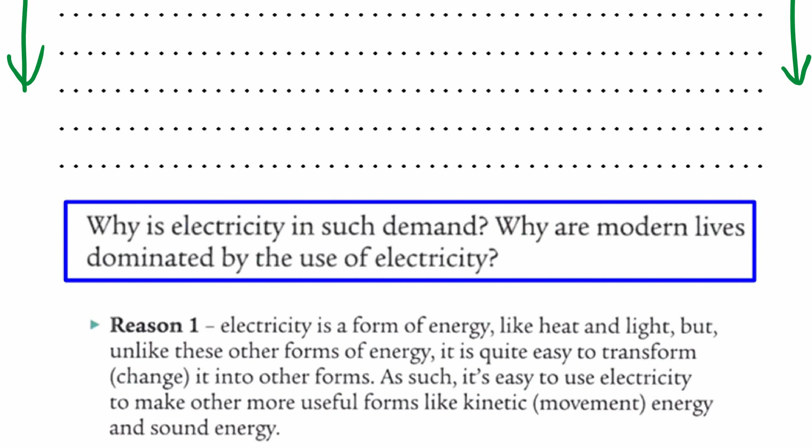Reason 1: Electricity is a form of energy like heat and light, but unlike other forms of energy, it's quite easy to transform, to change into other forms of energy. As such, it's easy to use electricity to make other more useful forms like kinetic energy and sound energy.

Just to put that into context and for you to gain a deeper understanding and appreciation of that, what I'd like you to do is complete this table. There's one that's been started there on the screen for you. I'd like you to use 2 keys, ideally highlighted in 2 different color pens as you can see on the screen, to show which forms of energy are useful and which are wasted, because we're going to be learning more about that later in this topic. And I'd like you to do it for 4 different appliances, which you've got written down there.

The first one has been done for you, the TV. If you think of a TV, light comes out of it, that's how we see images on the screen, and sound comes out as we listen to what comes from the television. But a byproduct of producing that light and sound is that we also produce heat energy, which is wasted. So copy down in your booklets what's on the screen, then write down the types of energy electrical energy is transformed into for the toaster, the hairdryer and the washing machine, and use your own key to show which is useful and which are wasted. Press pause now, and when you've completed the table, press play.

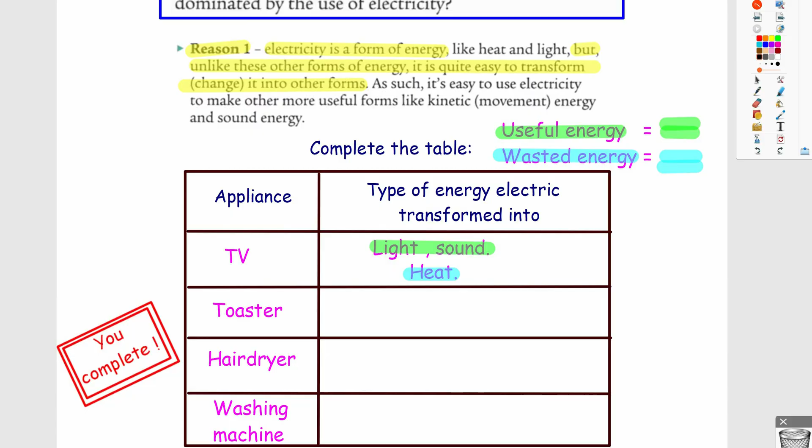Okay, now I've completed the table, and what I haven't done yet is highlight the useful forms of energy. So the toaster: heat, to toast the bread. In a hairdryer you need warm air, and that air needs to move towards your hair. And in a washing machine: heat of the water, and kinetic energy to turn the drum of the washing machine around.

So what's left over, of course, are the wasted forms of energy. There'll be a bit of light as the wires in the toaster heat up, and the hairdryer makes sound, as does the washing machine.

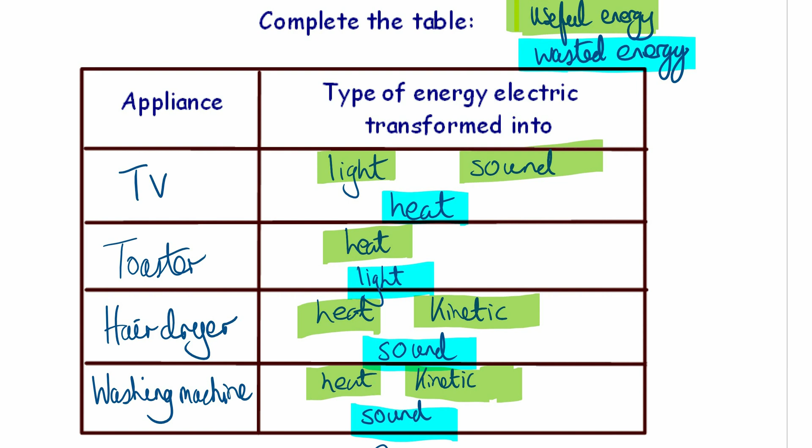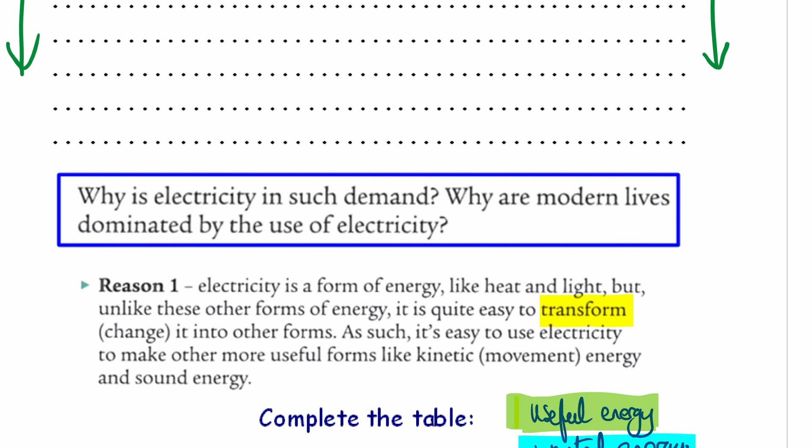If you turn to the next page, it says summarize reasons 2 and 3 in the lined paragraph. Remember, we just looked at reason 1, and the reason why electricity is so important is that we can turn it from one form into another.

Now reason 2 and 3 I'm going to put up in the video now, but then I'd like for you to turn that into your own words and complete 2 paragraphs, writing down reason 2 here and reason 3 here.

Here are the other 2 reasons, and what you need to do is write this down, paraphrase it into something that makes perhaps more sense to you. I'll read through both reasons. Electricity is relatively easy to move over long distances. Electric current travels well through metal wires, which makes getting electricity from one place where it's generated to a place where it's needed very simple. So that's all about moving electricity.

And reason 3, electricity is easy to generate from other forms of energy. Power stations burn a fuel, which eventually produces electricity.

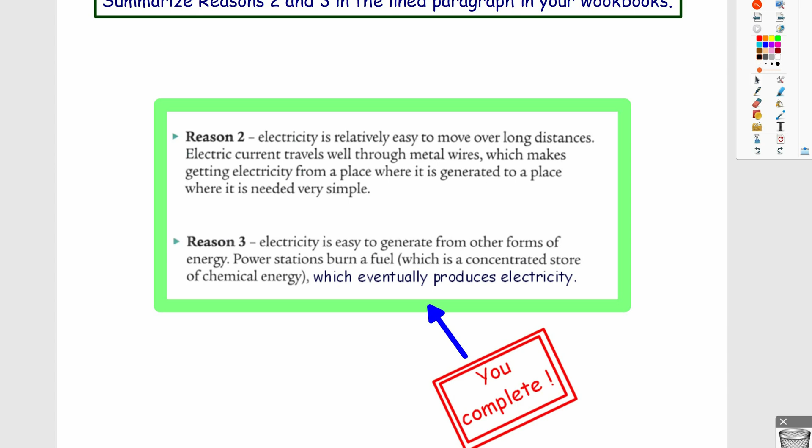Okay, so your job now then is to write reason 2 and 3 down there in your own words. Press pause now and press play when completed.

Now that we've gone over the importance of electricity in everyday use, we're now going to look at how electricity is generated when a fuel like coal is burnt.

A little starter for that, before we get into the nitty gritty of that exactly, is I'd like you now to, if you're in class or if you're at home, it might have to be something you do with a member of your family or a phone call. Discuss what you and your next door neighbour think the answer might be, and write it down in the box below. How on earth do we turn coal into electricity? Big black lump of stone into electricity.

Press pause, complete, and when you have completed, press play.

Britain's best-loved soap opera Coronation Street is just finishing. Would you like a cup of tea? Yes, please. At the end of that programme, there's a sudden surge in demand for electricity as kettles all over Britain are switched on. How is all that extra electricity suddenly made available?

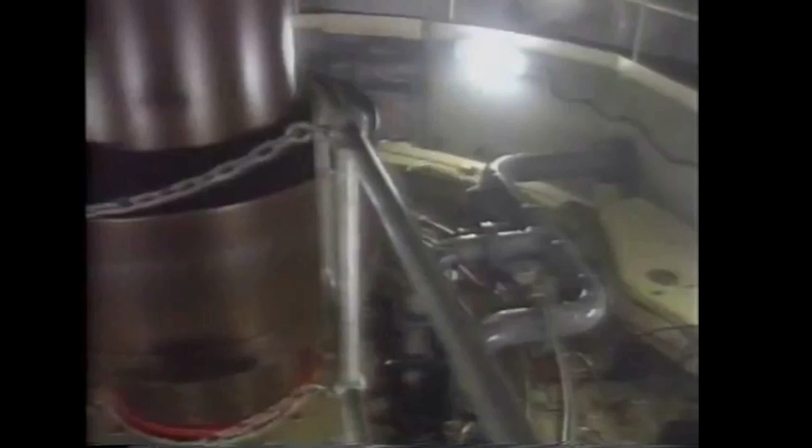Hello, Dinorwig, National Control here. Could you generate 240 megawatts on number 2 machine, please? Thank you. Believe it or not, there's a power station in this mountain. That's where the extra supply comes from. The power station can be switched on and will generate full power within 15 seconds. But it's the only one of its kind in England and Wales, and it's only ever used as a last resort, when there's an exceptional need to provide extra power for a short period of time.

Well, I'm going to stop the video there because the information we just covered would help you answer the first question. Now, the first question here, what type of electricity generation only takes 15 seconds to start to produce electricity?

It didn't actually give you the name of this type of electricity generation and the type of power station. It's a hydroelectric. I'm going to write that down for you. Hydro has to do with water. Hydroelectric.

Try that again. Hydroelectric is the type of electricity generation that takes 15 seconds to start. So the thinking there is, there's a sudden surge in demand. We need extra electricity for the country, and that's when that power station is switched on. Dinorwig is the name of that particular power station.

And what I want you to do now, I'm not going to stop and go through all the answers again, because you should be able to work the answers out yourself and answer them as we go through.

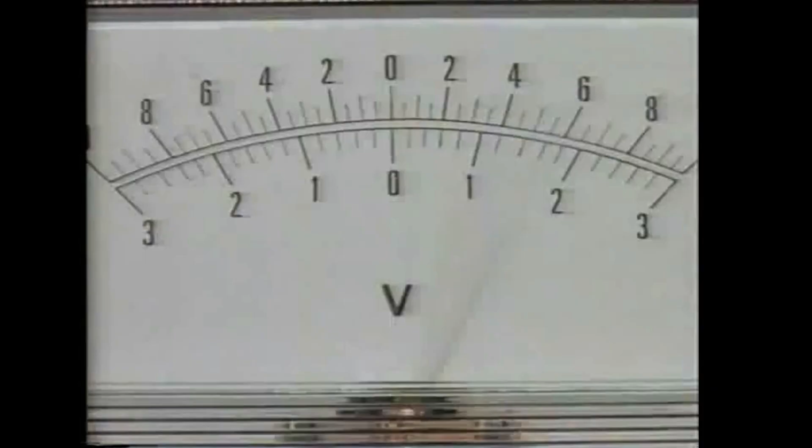Generating a little electricity is simple enough. When a magnet is introduced into the centre of a coil of wire, an electric current is induced in the wire, but only for as long as the magnet is moving. When the magnet is withdrawn from the coils, current is induced in the opposite direction. The faster the movement of the magnet, the bigger the current in the wire. If the magnet is moved rapidly in and out, the current keeps changing direction. It's an alternating current. This equipment is a simple generator.

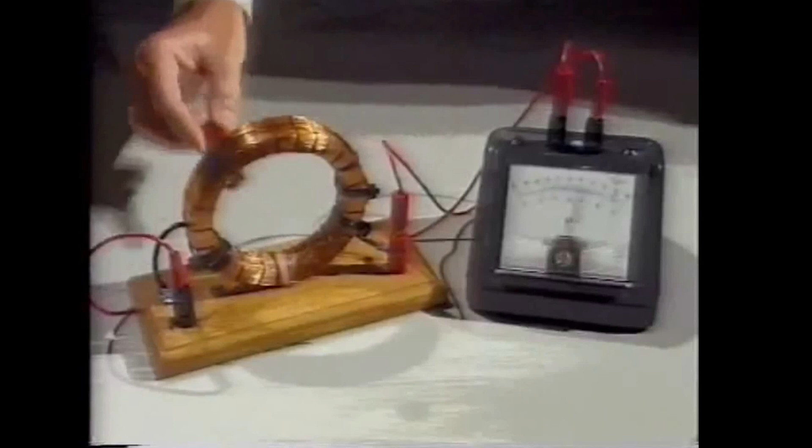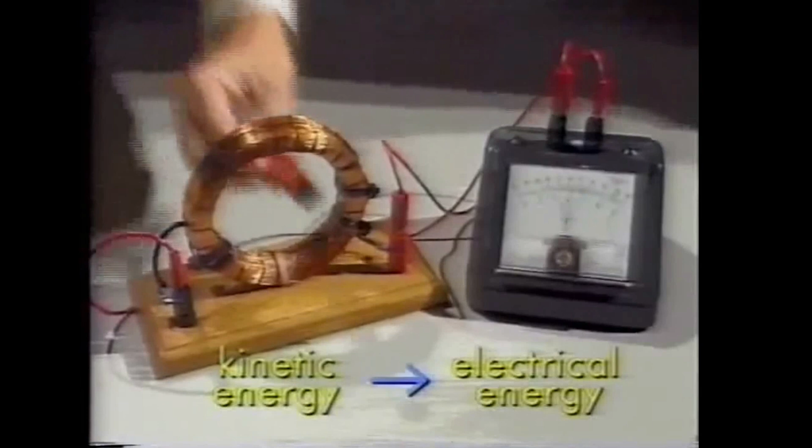Generating electricity is all about converting energy from one form into another. Here, kinetic energy, the movement of the magnet, is being converted into electrical energy in the wire. The electricity that we use in Britain is supplied from more than 70 power stations. They all have generators on a grand scale, which convert kinetic energy into electrical energy. Where does the kinetic energy, the movement, come from?

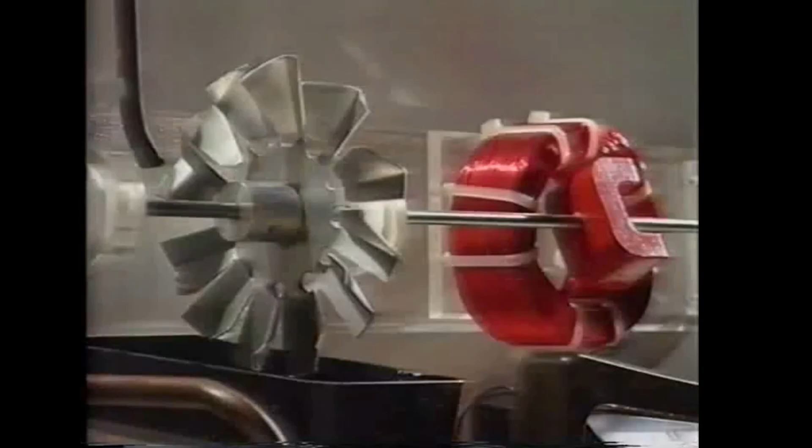It comes from a turbine, which is basically a wheel, which will turn when energy is applied to the blades. In most power stations, the energy is supplied in the form of steam.

This apparatus demonstrates the principle involved on a small scale. It's a miniature power station. The steam produced by boiling the kettle is directed at the turbine. It strikes the blades and makes the turbine rotate. The turbine drives the generator, a magnet moving in a coil of wire with many turns in it. An alternating current is generated. Notice the change in direction of the needle.

More than 70% of our electricity is generated at power stations which use coal as fuel to make steam. Coal is one of the fossil fuels, along with oil and natural gas.

I'll just pause the video there. This was made in the 1980s, and the amount of electricity now produced from coal has diminished dramatically since then. The percentage of coal that's being produced now is a lot less, and we'll look at that later on in this topic.

Gas. This is one of the biggest coal-fired power stations, at Fiddler's Ferry near Warrington in Cheshire.

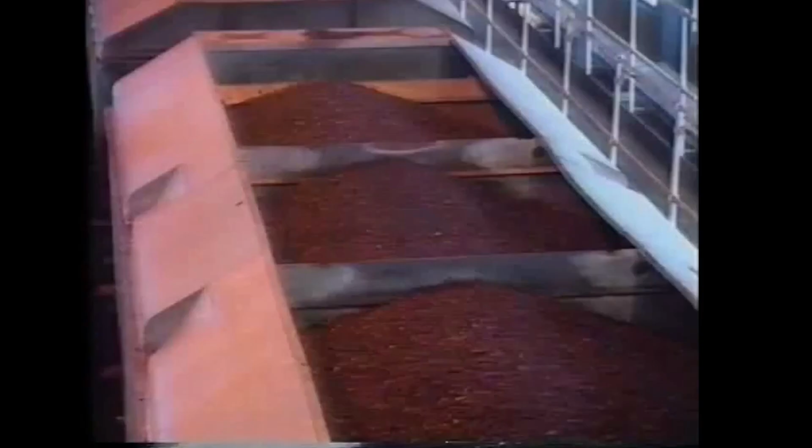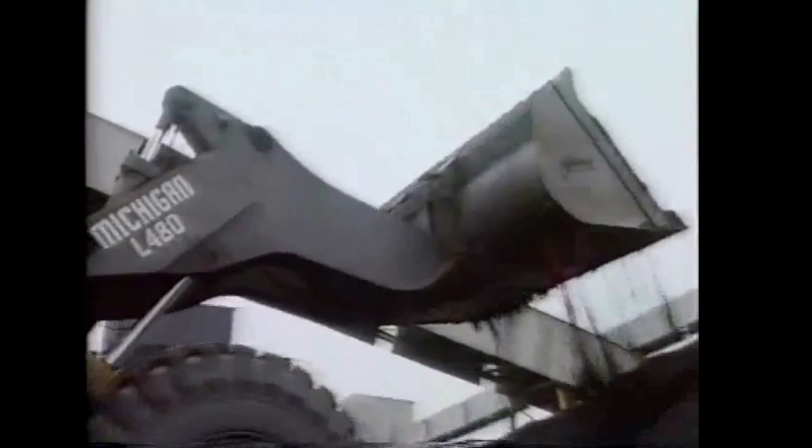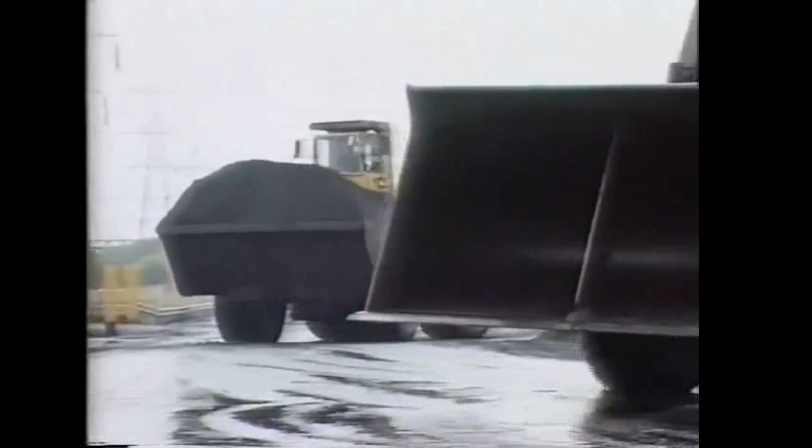The delivery train moves slowly through the discharge area without stopping. The coal falls into underground hoppers and is carried by conveyor belt to the coal store. The coal is already in small lumps, which makes for easier transportation and handling. A stockpile is kept in case of any disruption to supply. There are more than 400,000 tons here at the moment.

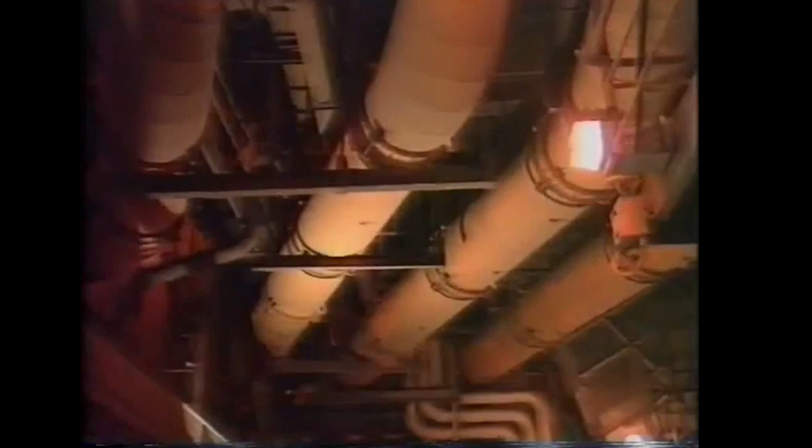The coal is crushed into very fine powder in these pulverizing units. That's done for two reasons. The smaller the pieces, the greater the surface area available for reaction during combustion. It also makes the fuel easier to handle. It can be blown with hot air as a fine powder through pipes and into the boiler furnace.

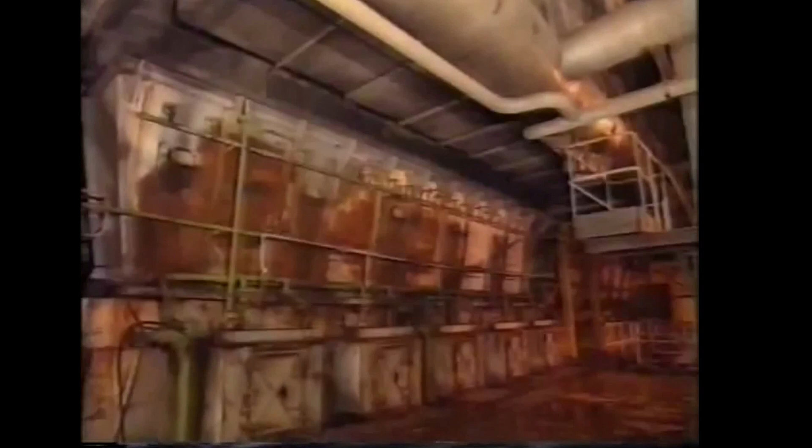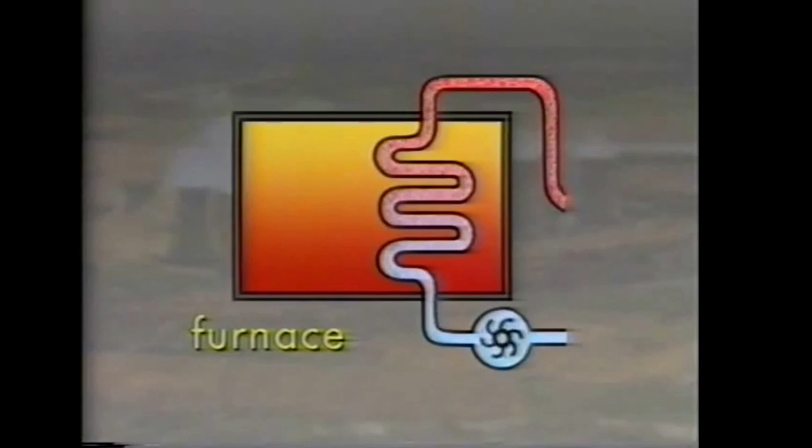In the furnace, the fine coal burns like a gas. All fossil fuels release energy when they are burned, combining with oxygen to produce a lot of heat, as well as some waste materials. The heat is absorbed by water contained in many kilometers of coiled tubing, which form the boiler wall. The water is turned into steam at high pressure.

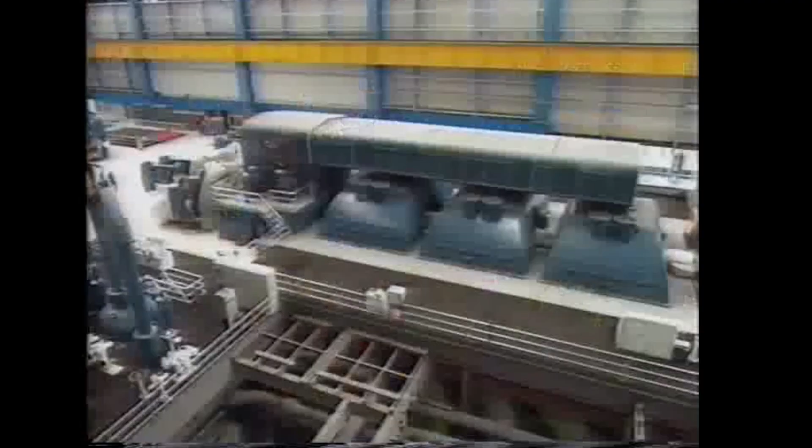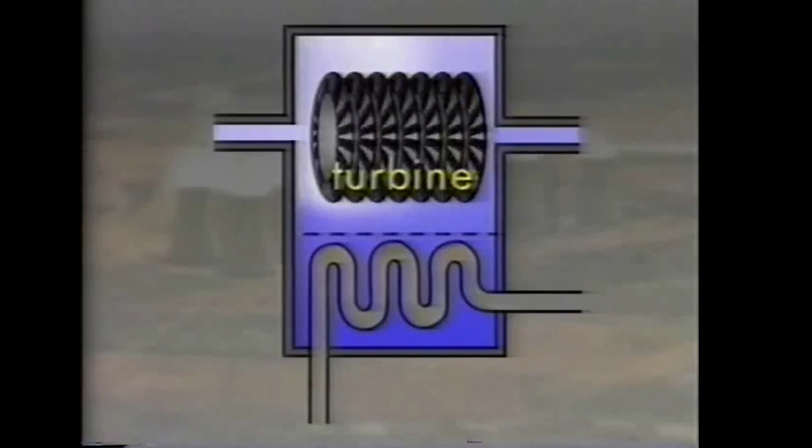This is where the next stage of the process happens, the power hall. The blue machine is the massive equivalent of the little turbine of our demonstration. The steam from the boiler goes into a high-pressure turbine. It turns the turbine, but in doing so gives up some of its energy. So it is fed back into the boiler to be reheated and used again to turn a low-pressure turbine.

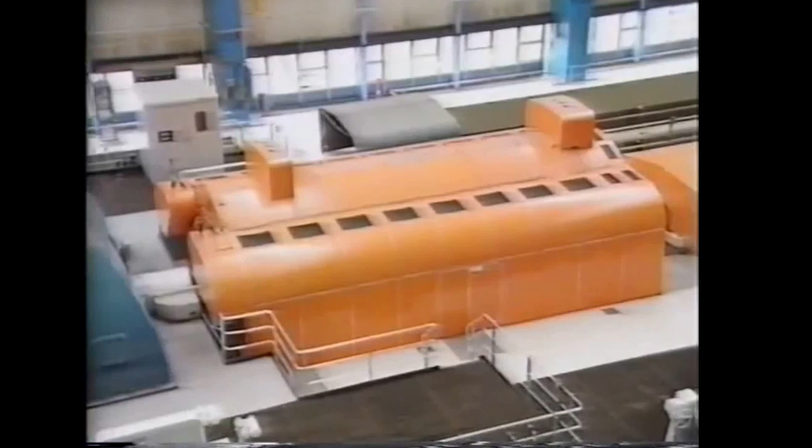The orange machine is the generator. Inside the generator, linked to the turbine by a shaft, is the rotor, which is actually a large electromagnet.

It turns at 3,000 revolutions a minute inside the stator, which has many coils of copper wire. The generator produces electricity at 22,000 volts. The power output of each generator is 500 megawatts, and at Fiddler's Ferry there are 4 of them, giving a combined total output of 2,000 megawatts.

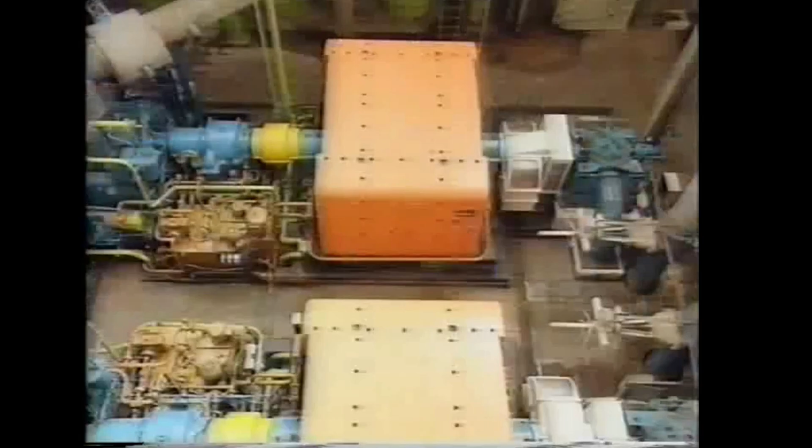Once the steam has done its work and exhausted its useful energy, it has to be turned back into water so that it can be reused. That happens in the green pipes, which are the condensers.

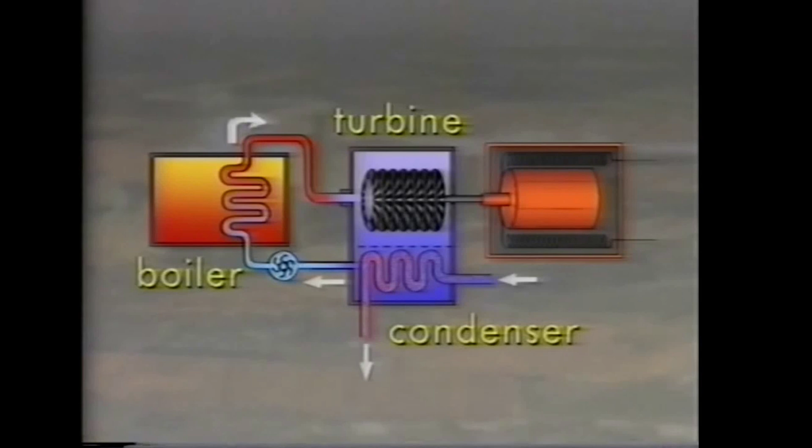The water in the boiler system is very pure. It has to be like that to minimize any problems with corrosion in the pipework. The water in the cooling system is different. It's poor quality, so it's kept separate.

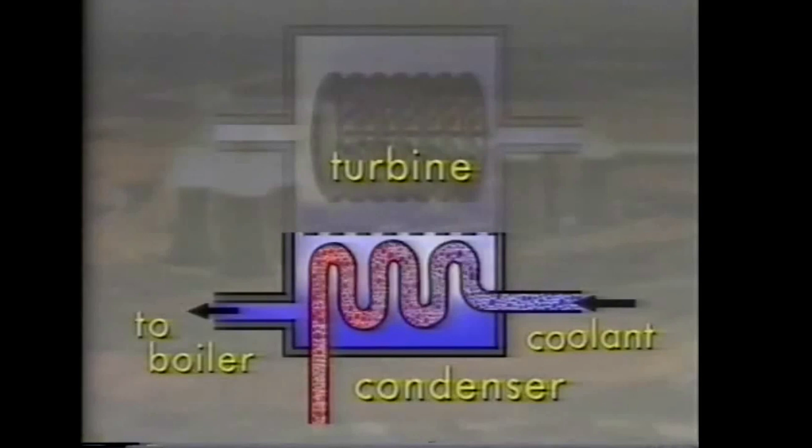A heat transfer system operates in the condensers. The steam from the turbines turns to water as it gives its heat to the coolant water. The coolant water is then pumped away to the cooling towers, which are a familiar sight at coal-fired power stations.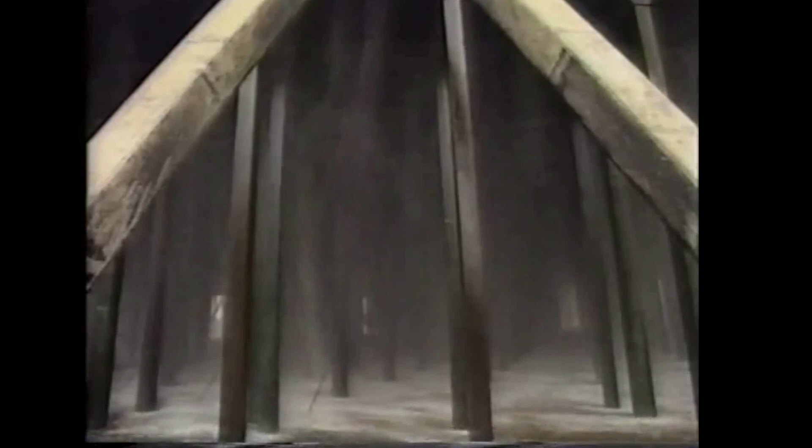The water is pumped in at around 15 meters up the tower. That's only a quarter of the way up. The height of the tower creates a powerful upward draft of cold air. The water is sprayed out through a sprinkler system. It is cooled by the cold air as it falls to the reservoir below.

Often people think that the output of a cooling tower is pollution in the form of smoke. In fact, it's only steam. Around 30,000 gallons of it is given out every day. But there is a lot of heat going up into the atmosphere.

Any water lost through evaporation in the cooling towers is replaced with water extracted from the nearby River Mersey.

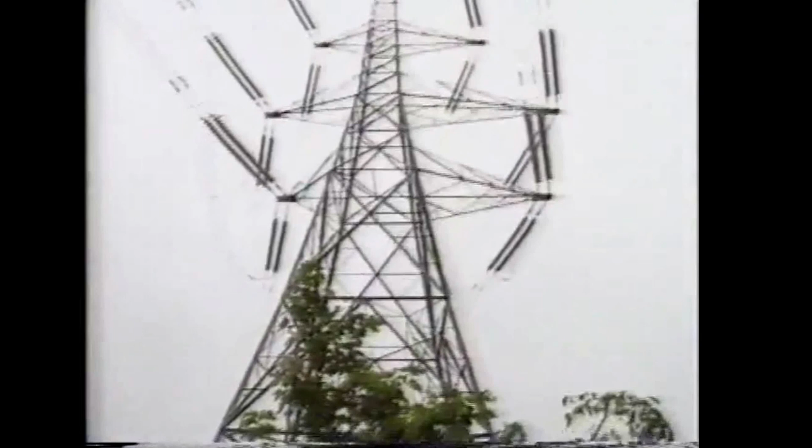Let's look now at a nuclear power station, and there's an immediate difference from the outside. There are no cooling towers. That's because most nuclear power stations are built next to the sea or an estuary.

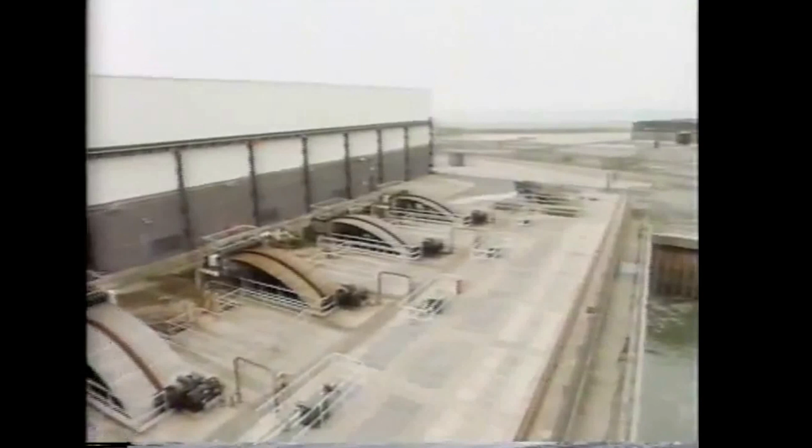This wheel filters the seawater to remove debris before it's used in the condensers as a coolant for the turbines. It's discharged back into the sea after it's been used.

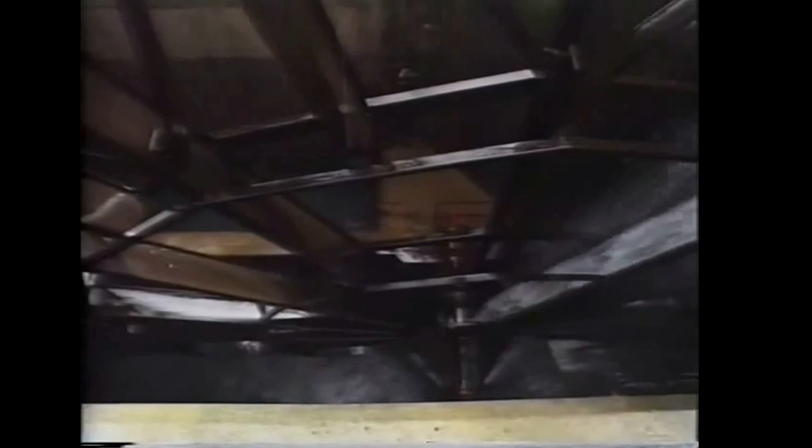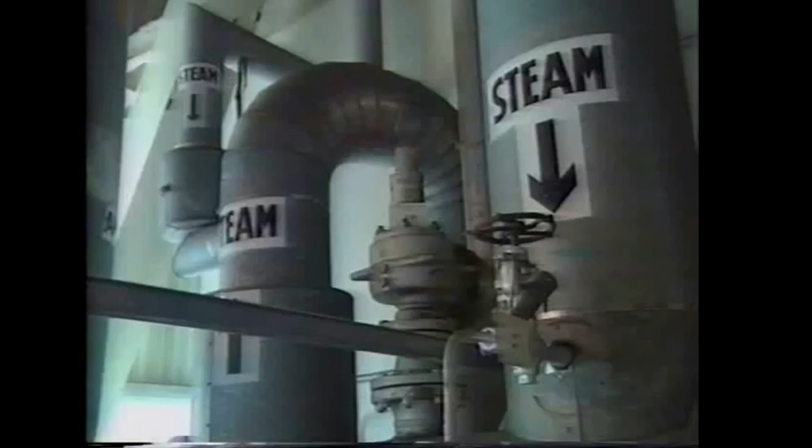The turbine room, though, is similar to Fiddler's Ferry. In fact, the turbines and generators at the two power stations are almost identical. It's the method of generating the steam that's different.

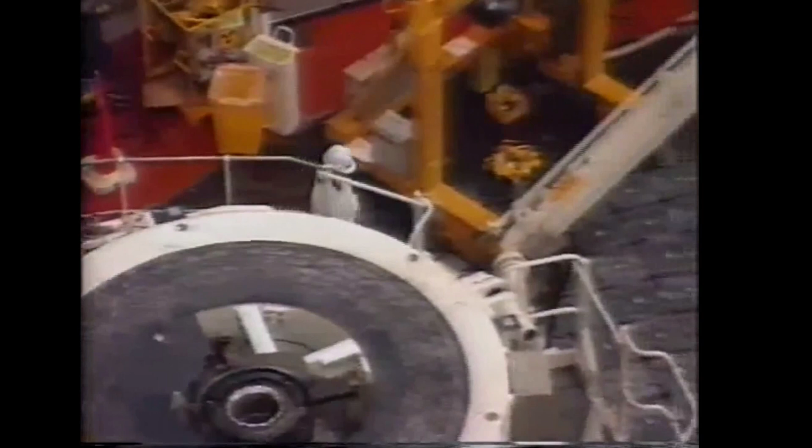This is the reactor hall at the Heysham nuclear power station in Lancashire. It's the equivalent of the boiler house at Fiddler's Ferry. There's a fuel involved here, but no combustion. The fuel is uranium dioxide. It contains a radioactive isotope which can be split to release huge amounts of energy.

This is the top of the nuclear reactor, and all the action takes place under here.

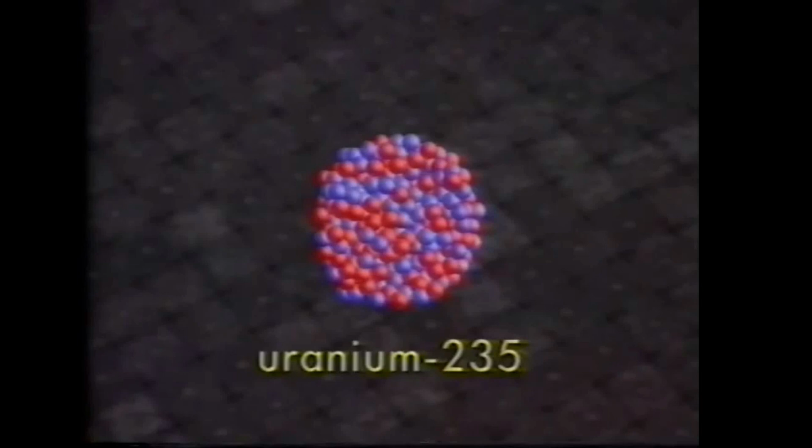In the process, the atoms of the isotope uranium-235 are bombarded with neutrons. The nucleus splits into two. You don't need to understand this science or this physics until year 11. The important point you need to understand is that heat is being produced during the nuclear reaction, which warms up the water and turns the water into steam. That's the important part, not how that heat is being produced.

I'll let the video run a little longer so you can see the similarities between a nuclear power station and the fossil fuel power station. A deal of heat is given out. The heat is used to make steam in the boiler.

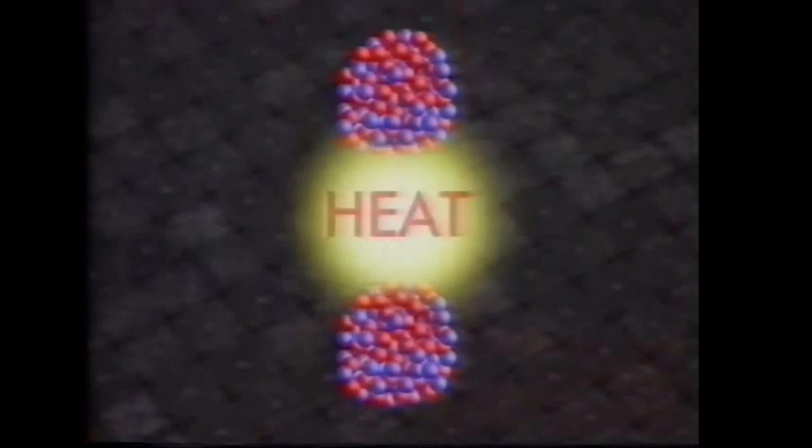The fission, that's the splitting of the nucleus, causes other neutrons to be released. Those neutrons then go on to collide with adjacent atoms of the isotope, and further splitting happens. When fission takes place in a series of atoms, that is called a chain reaction.

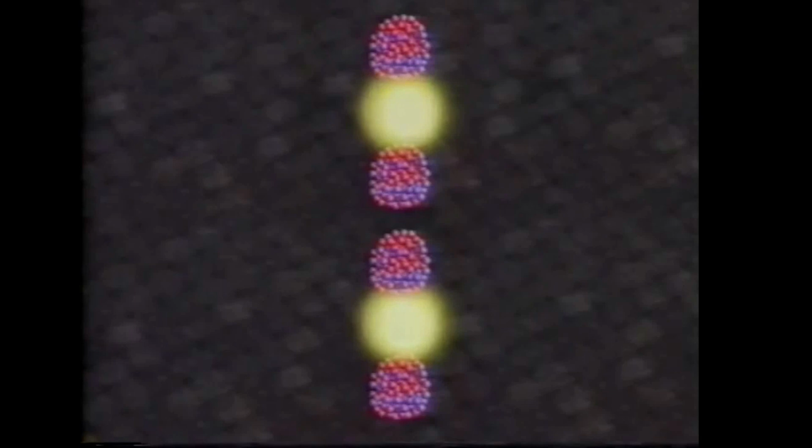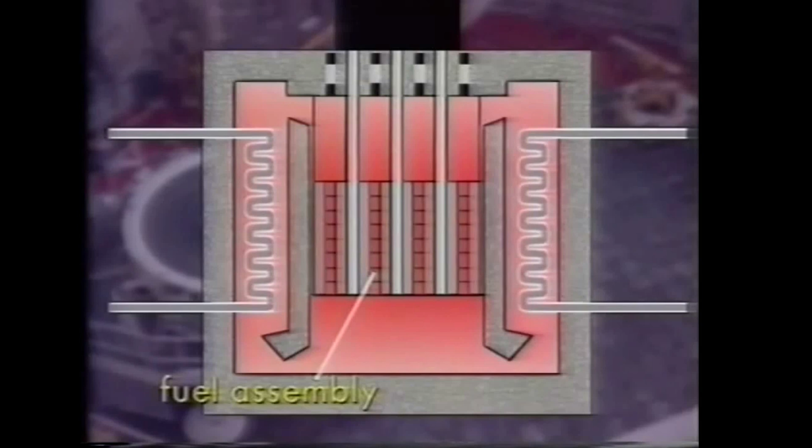In the nuclear reactor at Heysham, the fuel is in the form of pellets of uranium dioxide. The pellets are put into steel cans, which are then linked together to form a fuel element. 8 elements in line make up a fuel assembly. The fuel assemblies are surrounded by a graphite core, which is essential to the process.

Nuclear fission, the splitting of the atoms, happens within the fuel assemblies. The graphite slows down fast neutrons that are released by fission. This makes them more easily absorbed by other atoms, so that a chain reaction occurs.

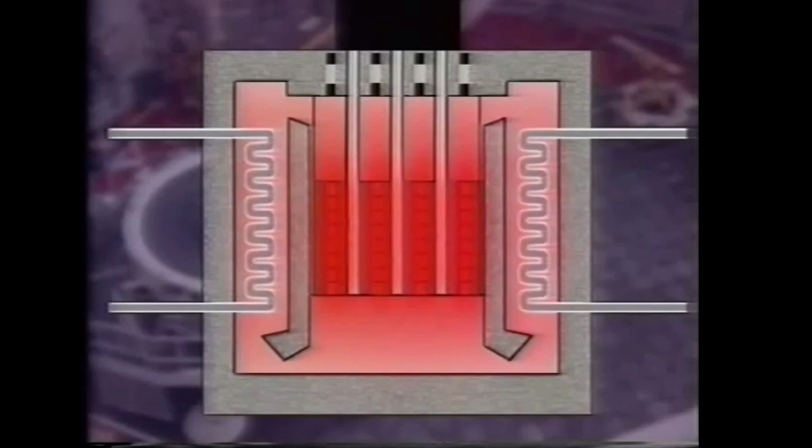If the chain reaction was allowed to go unchecked, the consequences could be disastrous. The heat would build up until the reactor melted. So a control mechanism is built in.

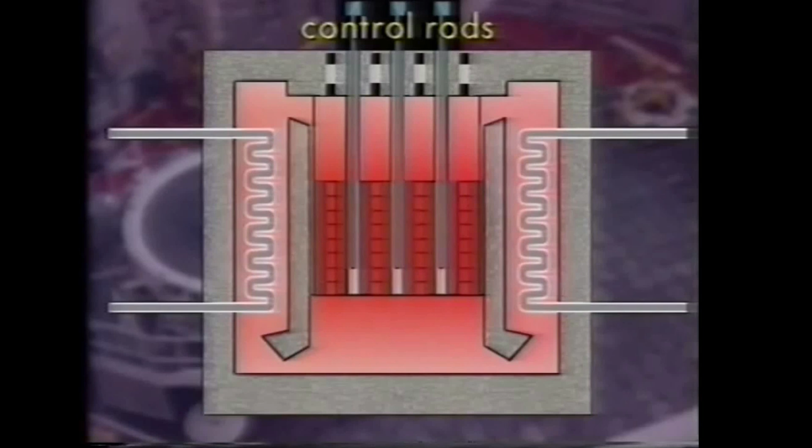The reactor core also houses control rods made of boron. Boron is capable of capturing fast-moving neutrons and absorbing their energy. So the rods can be raised or lowered to control the rate of the chain reaction.

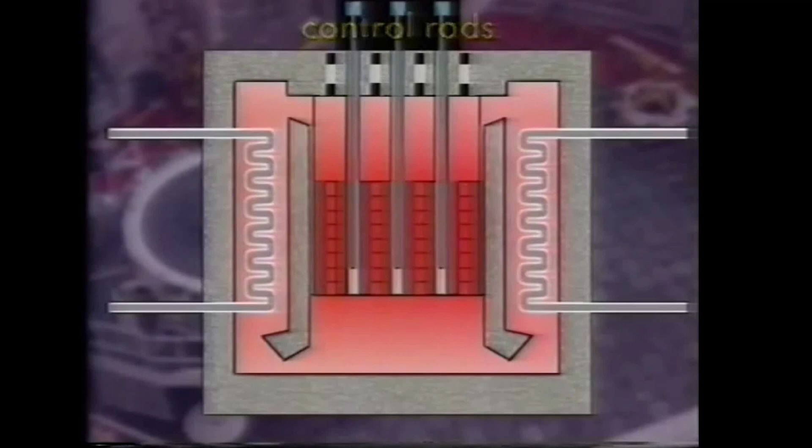The heat from the fission is absorbed by carbon dioxide gas, which circulates through the reactor. For this reason, it's known as an advanced gas-cooled reactor.

The important point to understand is that water comes in, steam comes out. To turn water into steam, you need heat, and in this case the heat comes from a nuclear reaction. The steam then drives a turbine, which drives a generator, which produces electricity.

Can you self-assess your work now please with a red pen? Name the 3 fossil fuels that could be used in power stations: oil, coal and natural gas. What is induced when a magnet is pushed into a coil of wire? That's an electric current, or I'd allow electricity.

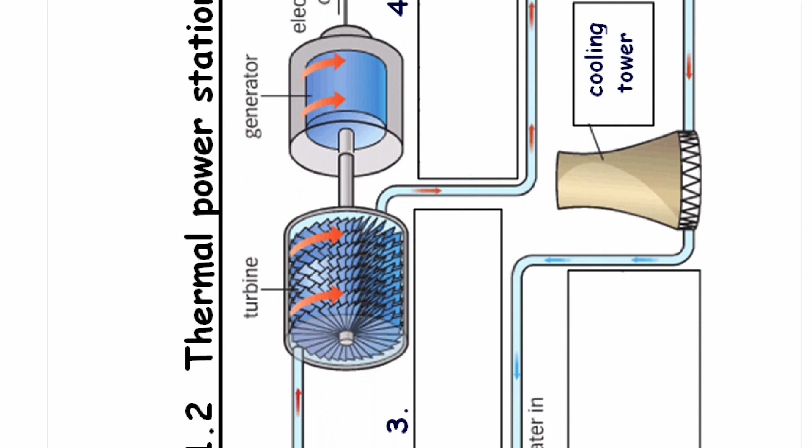When you finish that, turn over to page 6, which looks like that. I've just copied and rotated the image to the side, which shows the different parts of a thermal power station, which you've just learned about, and I give an additional explanation to help you complete this. What you've got to do is fill in those 5 boxes. I've done 2 there for you in the video.

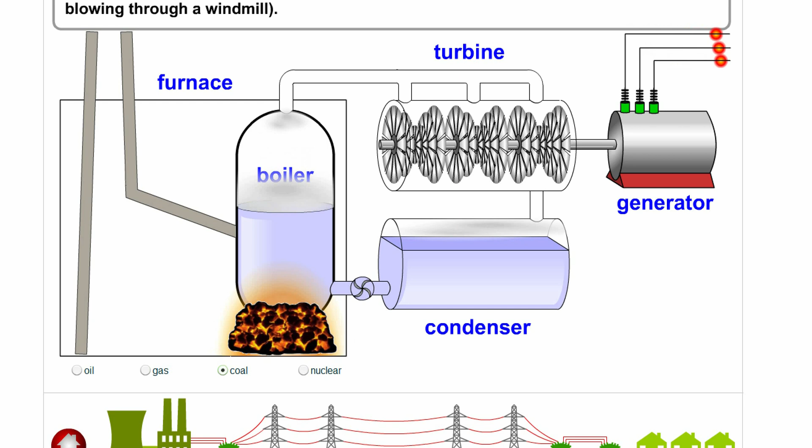The generator: a shaft connected to the turbine spins a powerful magnet inside the generator. The rotating magnetic field generates an electric current in the coils of wire surrounding the magnet. The electrical energy produced by the generator is delivered at around 25,000 volts.

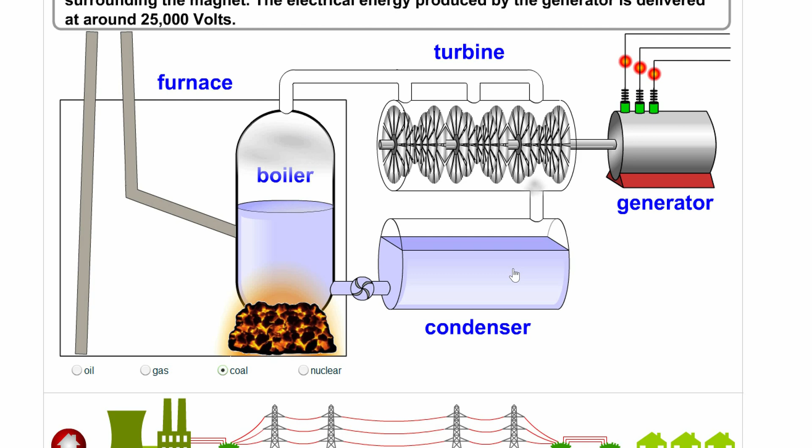And finally, the condenser. Steam from the turbine is condensed back into water, which is returned to the boiler for reuse. A continuous supply of water circulates around the condenser to carry the unused heat away.

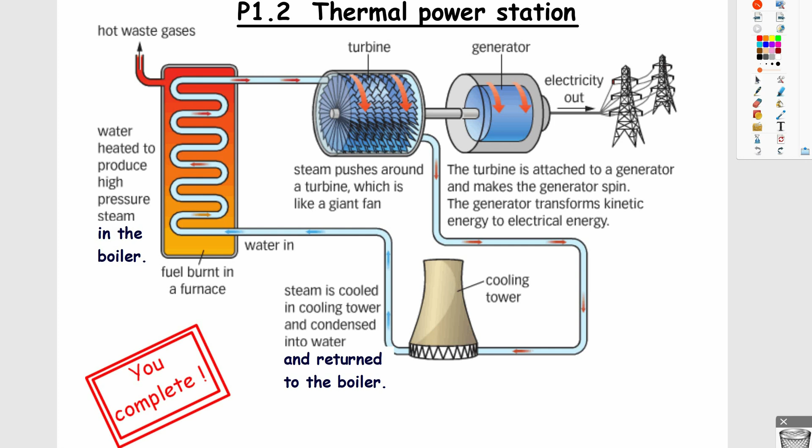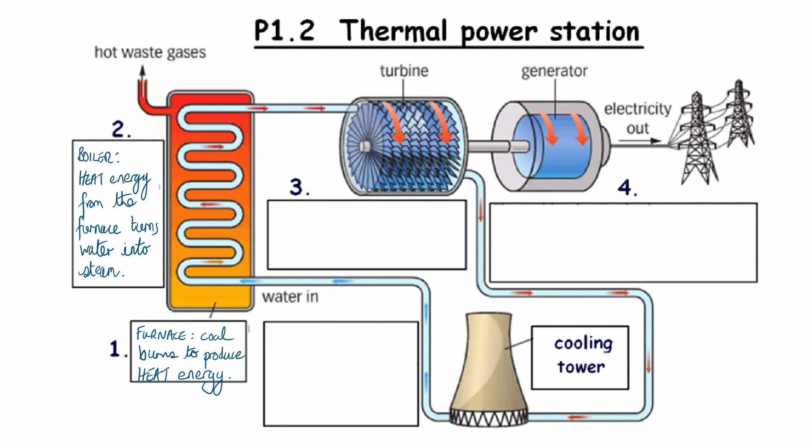Now that is also written down slightly differently there, so you can use either my verbal explanation or pause the video here in order to complete that. Pause the video when you've completed all those boxes. Oh, and by the way, what I'd like you to do is put in capital letters where there's a change of energy.

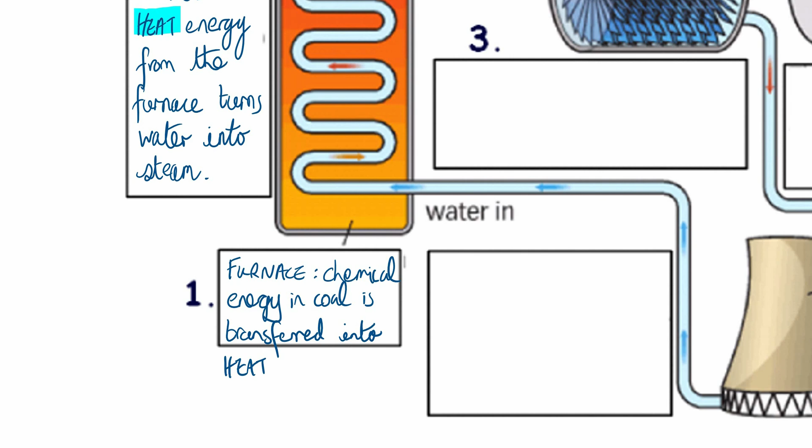Coal burns to produce heat energy. What I could have done there actually is take that back a step further and say that the chemical energy in coal is transferred into heat energy when burnt. Okay, so that's page 6.

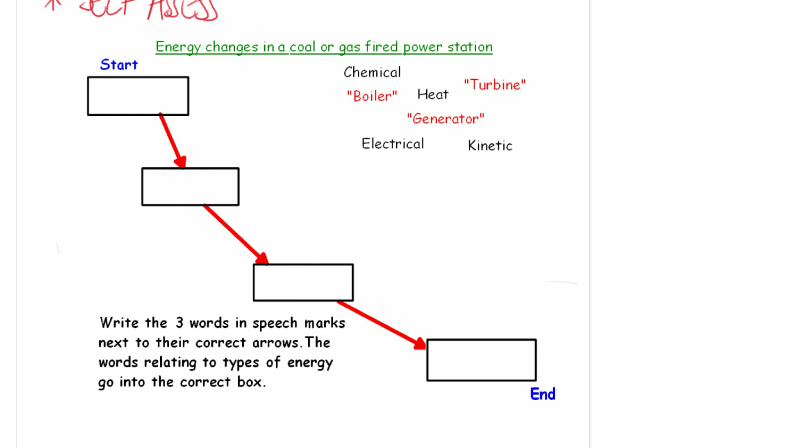On to page 7. This is a self-assess. What you need to do - the instructions are here - write the 3 words in speech marks next to the correct arrows. So there's 3 arrows and there's 4 boxes.

So you can see you've got 3 words in red, which are in speech marks next to the correct arrows, and then the words relating to types of energy go into the correct box. So you've got 4 boxes and you've got 4 words remaining. I'll just do the first one.

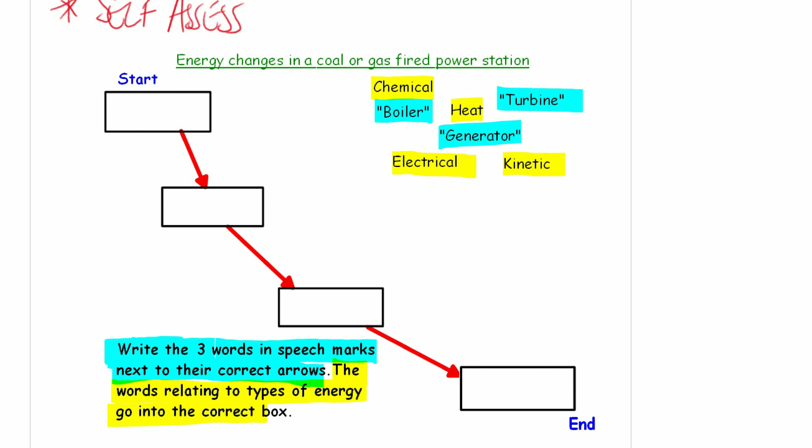So we've got chemical turns to heat in the boiler. So we write boiler next to the arrow. Then we've got chemical and turned into heat in the boiler. So can you complete that? And when you complete it, I'll give you the answers and we'll mark together, or you mark your own.

As we go along, it might be worth crossing off the words you've used. After the boiler, we have the turbine and then the generator. So we get turbine, generator, and the turbine turns the steam into kinetic energy. The kinetic energy really is in the moving steam, and then that kinetic energy goes into the generator and produces electrical energy. Tick the ones you got right and correct the ones which you've got wrong.

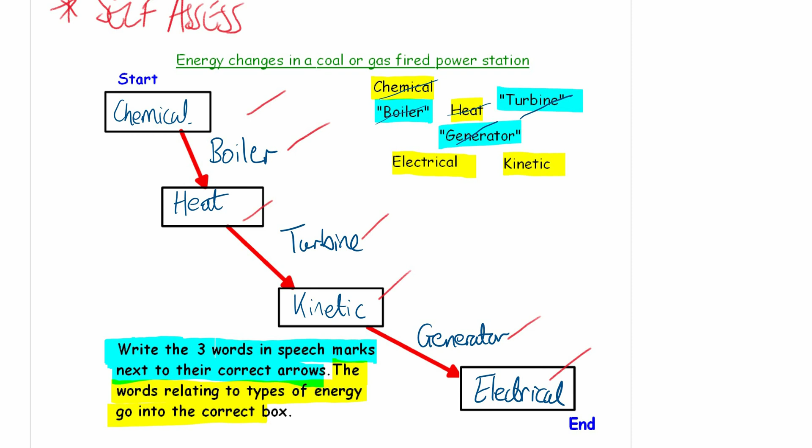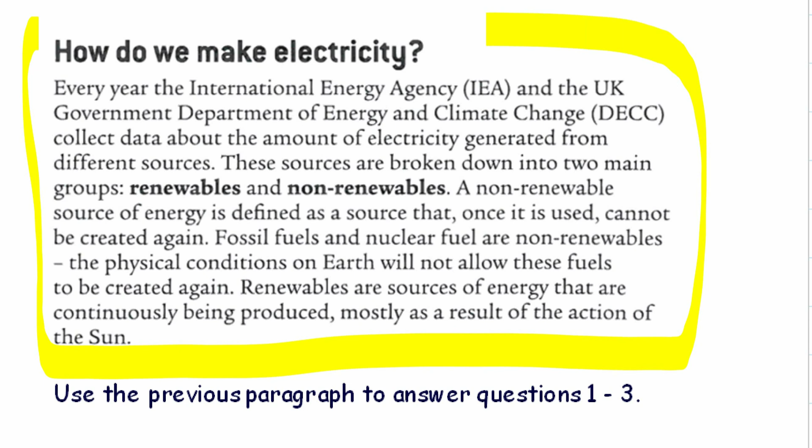Next, bottom of page 7, what you need to do is read that paragraph and use it to help answer the questions below. So it's this paragraph here which I'm talking about, and there's information in there that's going to help you answer these questions below.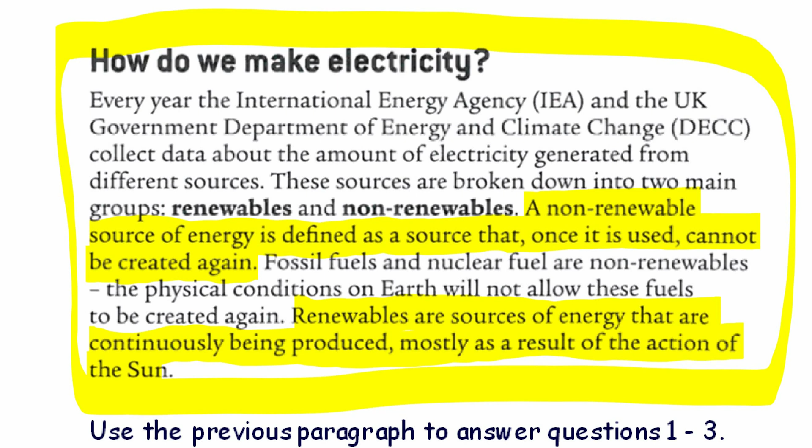Now this is the teacher assess part of the lesson, and question 1 says provide a definition for non-renewable energy sources, and question 2 for renewable energy sources. You can get the definitions here. A non-renewable source of energy is defined as a source that, once it's used, cannot be created again. It's really important you understand the difference - renewable sources of energy are continuously being produced, mostly as a result of the action of the sun. So wood, for example, is sometimes classed wrongly by pupils, but because you can regrow trees, it's classed as renewable because it grows due to photosynthesis due to the sun.

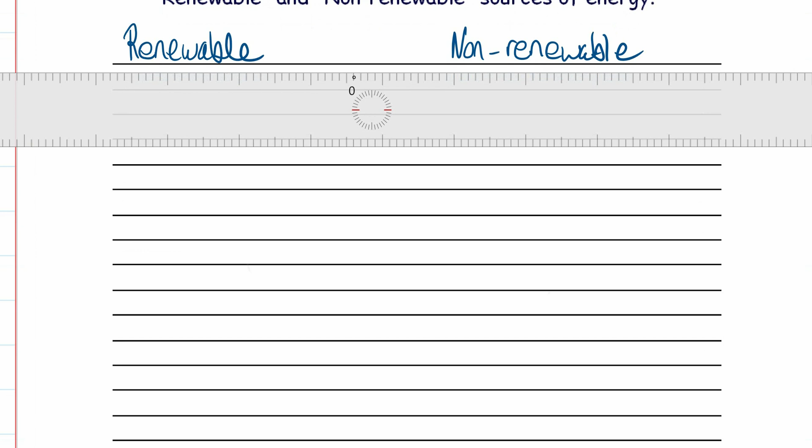Question 3 is related to that because it's asking you to complete the table, a very simple table with 2 columns, renewable and non-renewable, and you've got to just list down the renewable sources of energy in the left-hand column, and of course the non-renewable things you can't renew in the right-hand column.

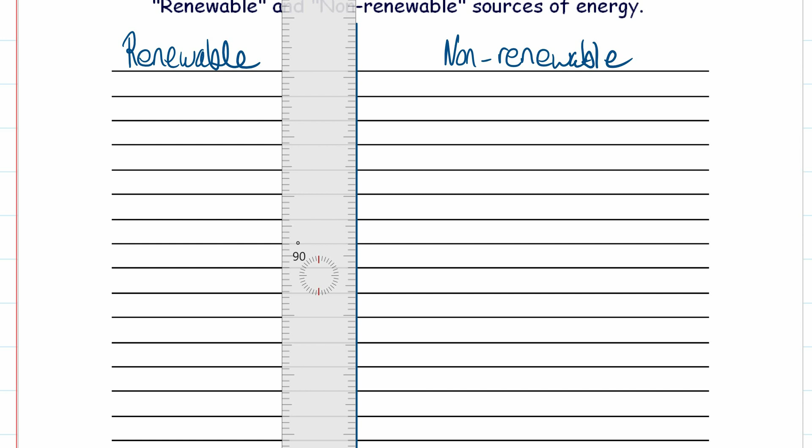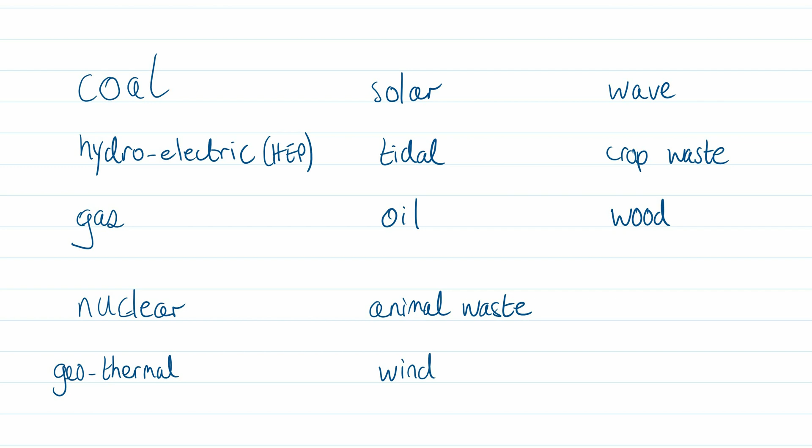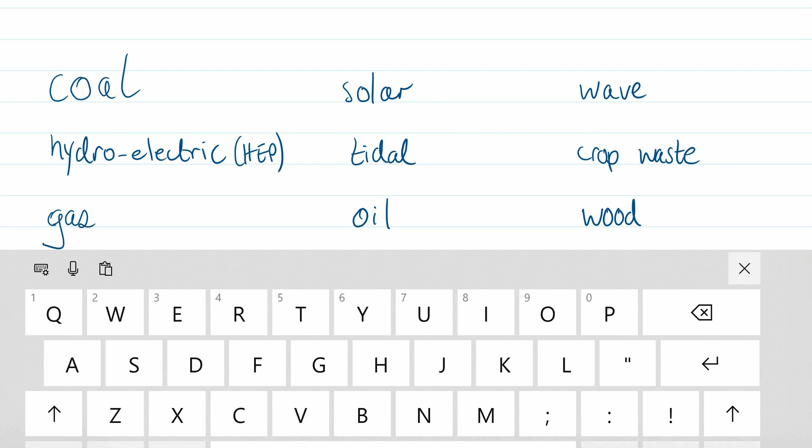Just to help with that, I know it says in the question to use the IWB, the interactive whiteboard, but I've just written down the different energy sources here for you. Now remember, these are called energy sources, right? They are sources of energy. That's where energy can come from. They are not what we would class as forms of energy. Forms of energy are your heat, your sound, your light, electrical, etc. Sources of energy are where energy can come from to create electrical energy and other forms of energy.

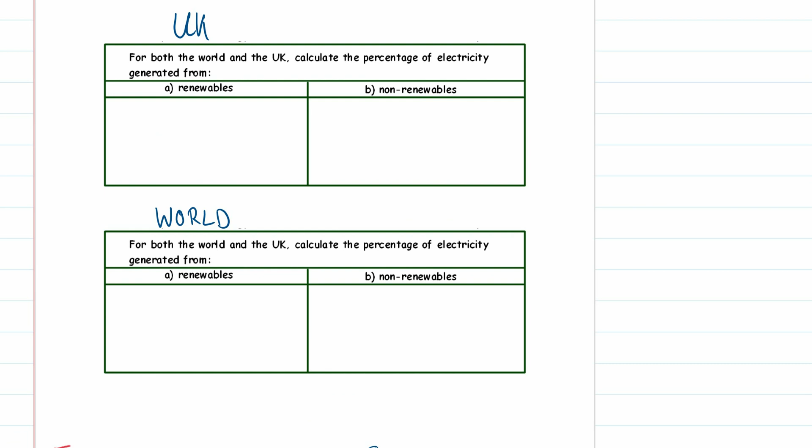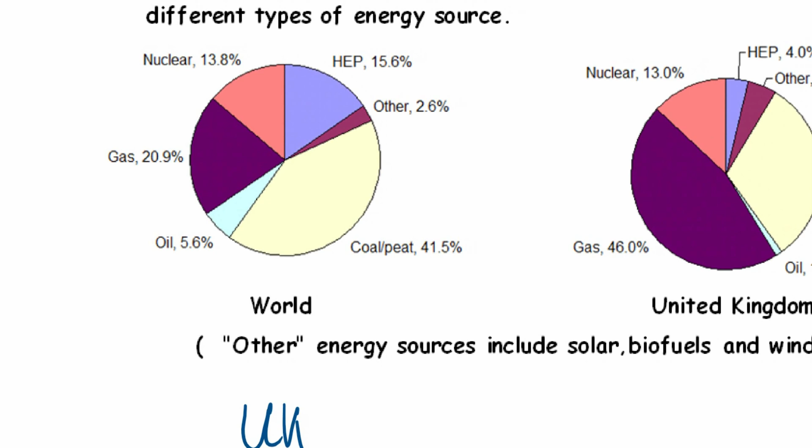So that's question 3. Question 4 is the final question of today's lesson, because we're going to finish at the bottom of page 9. And you've got 2 pie charts. If we look at the one on the right hand side for the UK, it tells us how much energy...

I alluded to this earlier on in the lesson, looking at the amount of energy that's created from different sources. That's Alexa in the background, thinking I'm talking to Alexa, so apologies for that. I'll try again. I alluded to this earlier in this video. I avoided the word lesson because that's the trigger word that starts Alexa off.

So you can see here 31%, at the point at which this booklet was written, 31% from coal and peat. I think that's now a lot less, but you can look that up on the internet.

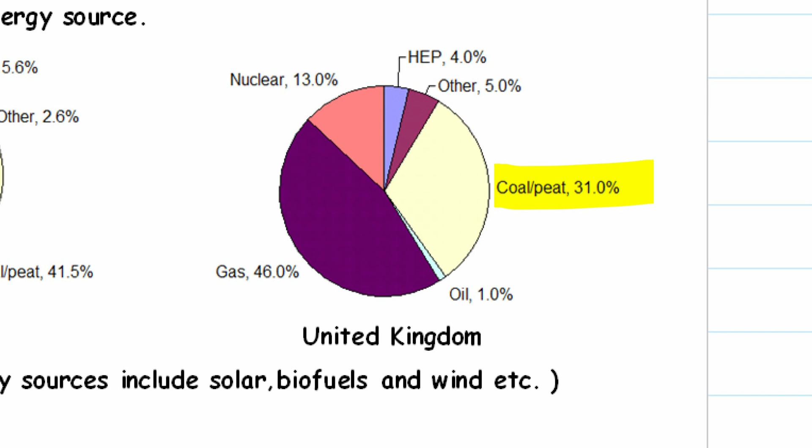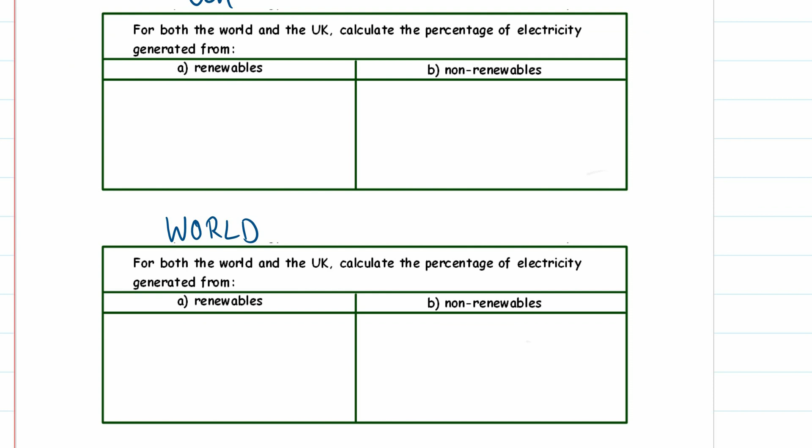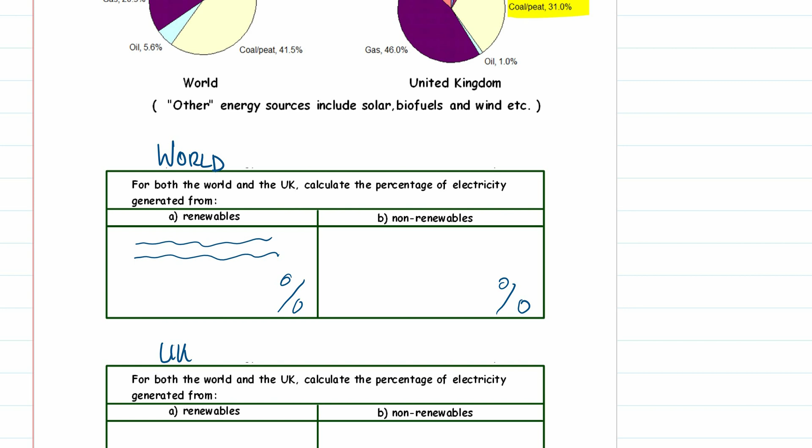So what you've got to do, you've got 2 tables, top one for the UK, bottom one for the world. Or let's swap those 2 around actually, because that might confuse you, because the world pie chart is on the left, that comes first, and the UK pie chart is on the right. So we'll put that second. So we'll do the UK there, we'll do the world there, and you've got to work out, adding up percentages to get a final percentage for renewables and non-renewables related to this pie chart, and the table at the bottom relates to that pie chart.

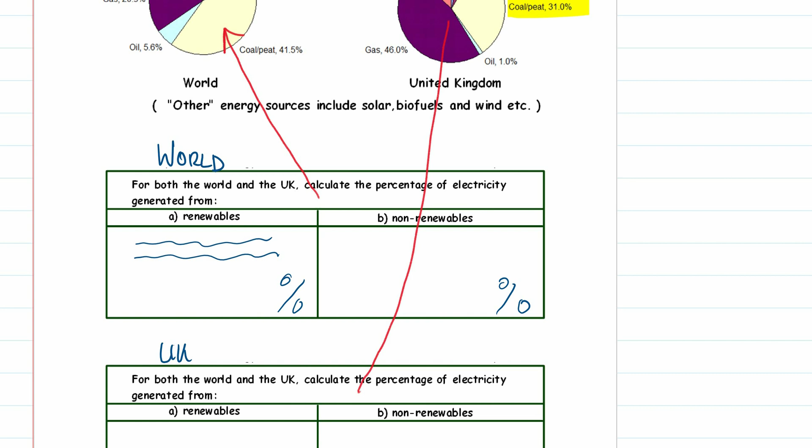That's the end of lesson 1. Make sure you complete the plenary assessment on Study Zone.